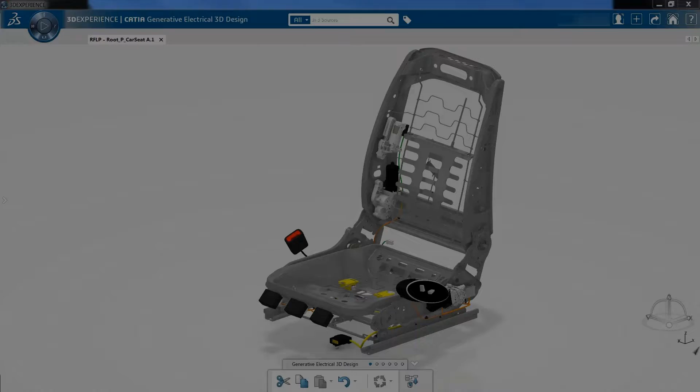Electrical 3D System Engineer defines, based on the electrical systems definition, the 3D representation of the wire harness assembly in context with the complete product. This is to improve the overall wire harness quality, shorten design time and reduce material cost by optimizing the physical design.

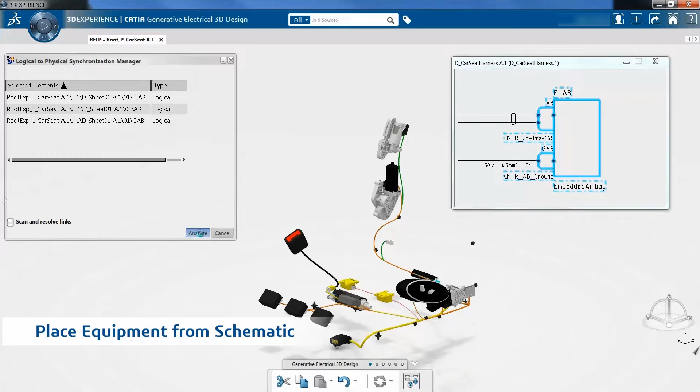Using the synchronization capabilities between the logical schematic design and the 3D, we first place the missing equipment in the physical world. Since the schematic did not contain the final placement coordinates, the airbag unit will be placed at the origin. Dedicated placement functionality will support the easy placement at the right position.

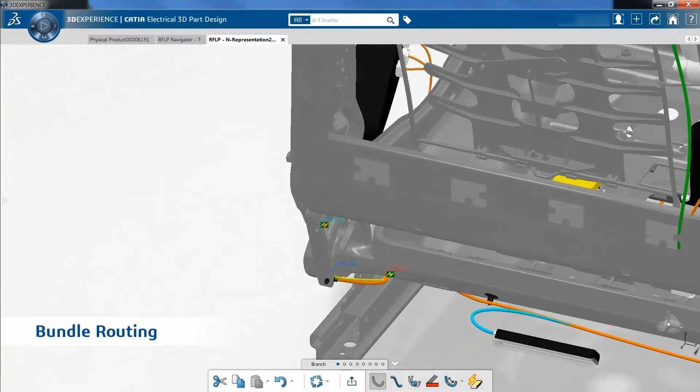Now the harness from the bottom of the seat to the airbag unit is routed. In this case we have an estimate of the diameter and bend radius, since we do not have wires inside. This will be adjusted when synchronizing the wires from the schematic as well.

We can define this bundle using references from existing geometry, like already placed supports or following surfaces from the mechanical parts. When selecting a connector, it will automatically connect in the right way to the bundle position point to guarantee the connection and its orientation.

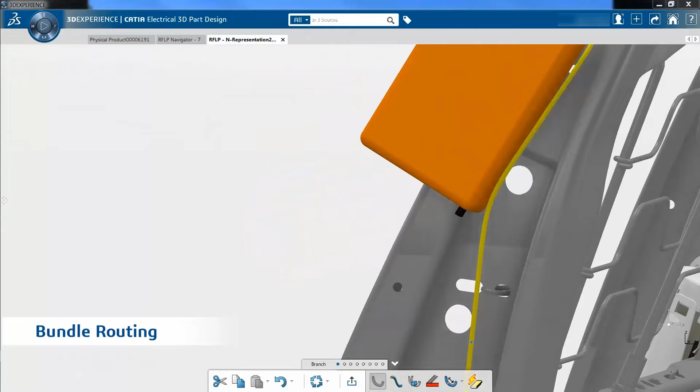Bundle segments can be easily defined from an existing bundle without the need of point creation. Just selecting the bundle and adjusting the position is all that is needed to split the bundle in several parts. We quickly check the connections between all bundles and connectors. All is green, so all is connected, before we synchronize the wires from the schematic.

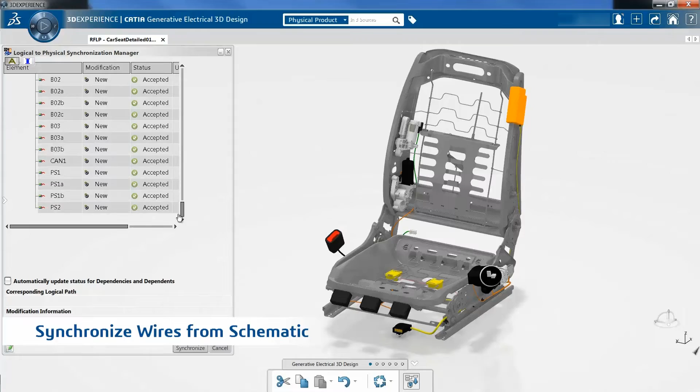In this case they come from the CATIA schematic application, but could as well come from IXF XML from other ECAD systems. CATIA will route these wires inside the already created bundles and instantly obtain the bundle diameter based on wire content, and will have available the length of each wire.

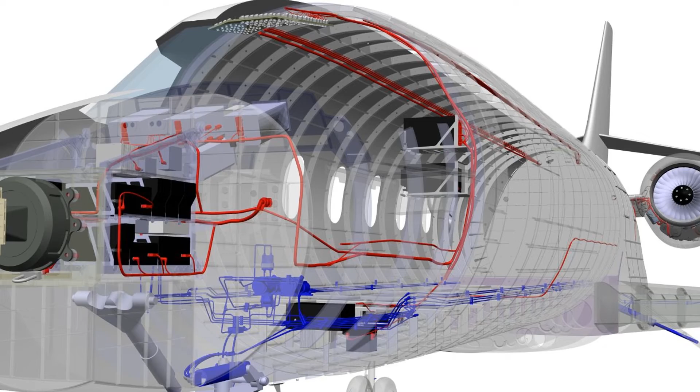It not only supports the creation of wires as can be found in transportation and mobility, but as well very demanding harnesses in the aerospace and defense industry, like aircraft and engines, and as well in industrial equipment machinery, like for example excavators.

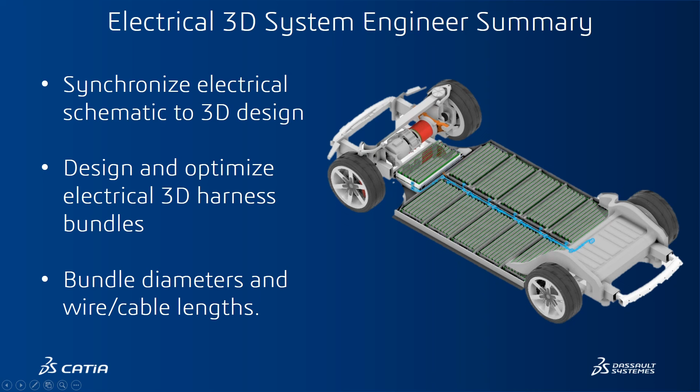To summarize, Electrical 3D System Engineer provides capabilities to synchronize the electrical schematic to 3D design to improve electrical systems quality and consistency, design and optimize electrical 3D harness bundles and cables accurately in the context of the full product, and route 3D wires and cables to obtain exact bundle diameters and wire and cable lengths.